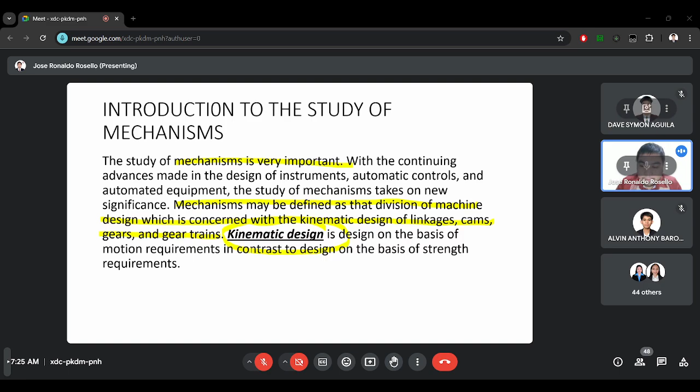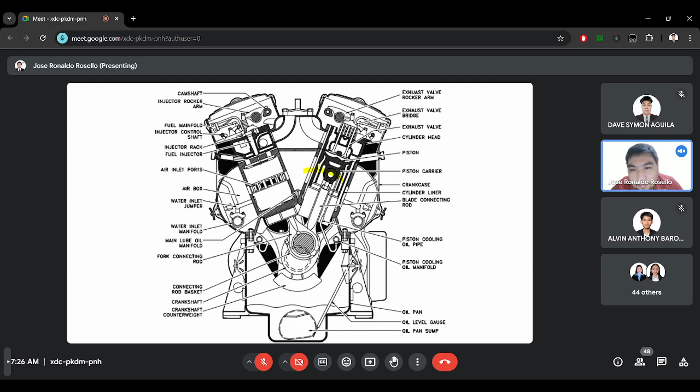For a clearer view, if you can imagine, this one is what we call the piston head. Then we have a link here. Then we have a crank here.

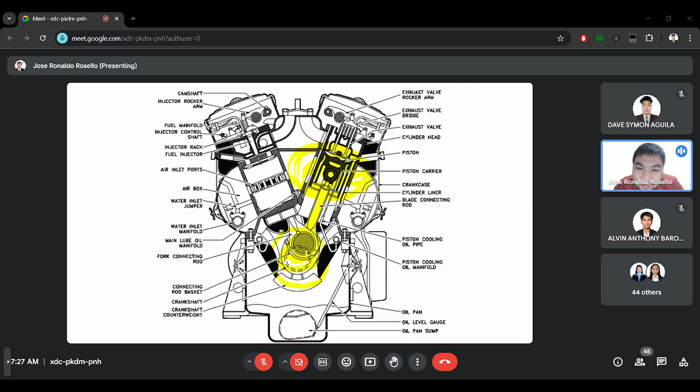So this crankshaft and this connecting rod can be represented using what I showed you, the slider crank mechanism. This is just, if you can imagine, a stick figure diagram of the actual machine, because in this way we can analyze the movement, velocity, and acceleration simpler than using the actual drawing.

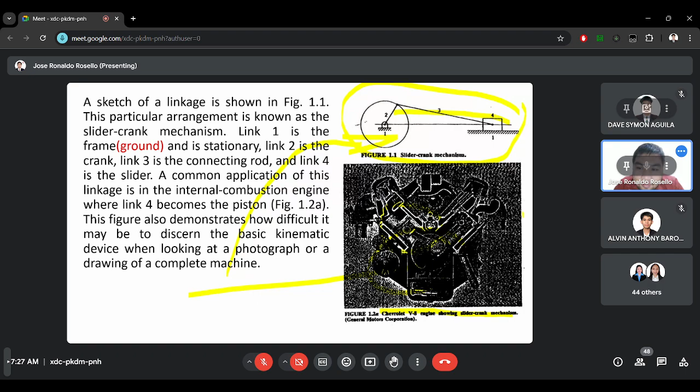Again, this is how it looks like. This is how a piston engine, piston head, and cylinder are arranged, and it can be interpreted into a slider crank mechanism, just like this. Again, this is what we call a kinematic diagram.

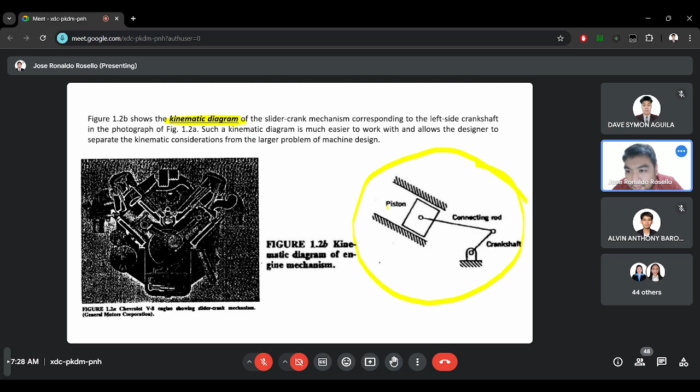For the kinematic diagram, this one is the connecting rod. This one represents the crankshaft, and this one represents the piston head. These have parts: the ground, the link, the slider, the joints, which I will discuss later.

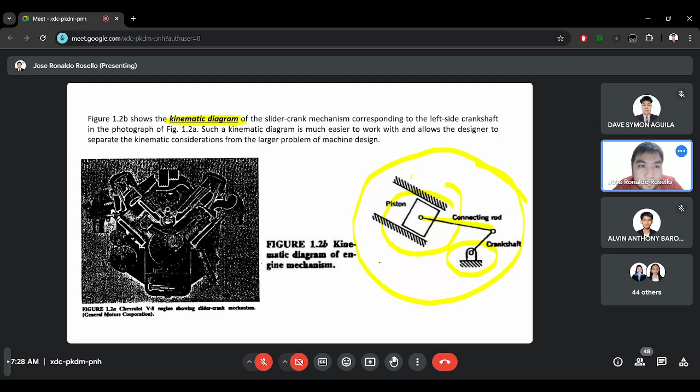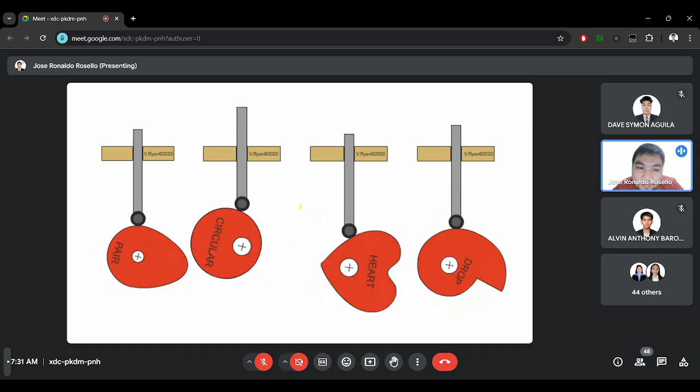Then we have the gears. Gears are used in many applications to transmit motion from one shaft to another with a constant angular velocity ratio. This is very familiar to all of us because as mechanical engineers, one of the symbols that identifies us is a gear.

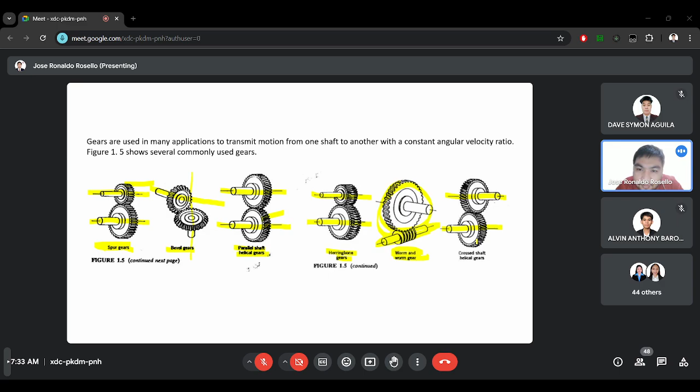We also have what we call the gear train. For gear trains, it's a simple understanding of having multiple gears in contact. So at least two is already considered a gear train.

So for this example, we are required to drive gear number 4 using gear number 1. And to make gear number 4 rotate, we have installed a compound gear in the middle to have the translation of the rotation from gear 1 to gear 2, then gear 2 to gear 3, then gear 3 to gear 4. So this is what we call the gear train.

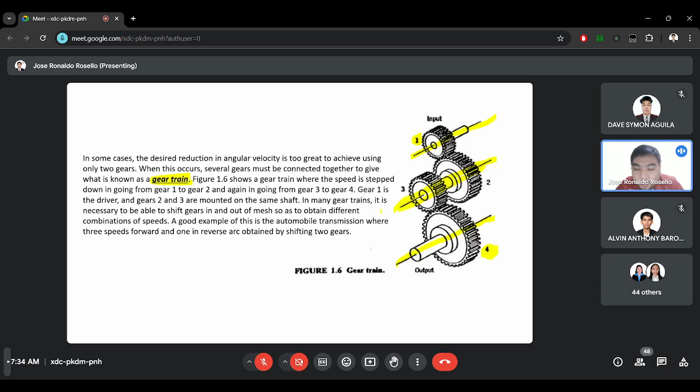So again, for gears, we will have a more specific topic here after the midterm, and you will be having a design plate for the gears.

Power transmitted by the elements must be so slight as to be negligible, which allows the components to be proportioned primarily on the basis of motion, strength being secondary importance.

So after machine elements, you will be taking machine design. And in machine design, you will focus on the strength applied on the materials. Once we have designed the mechanism in machine elements, in the machine design topic, we'll be analyzing the strength. So for this course, we will focus on the motions of the mechanism parts.

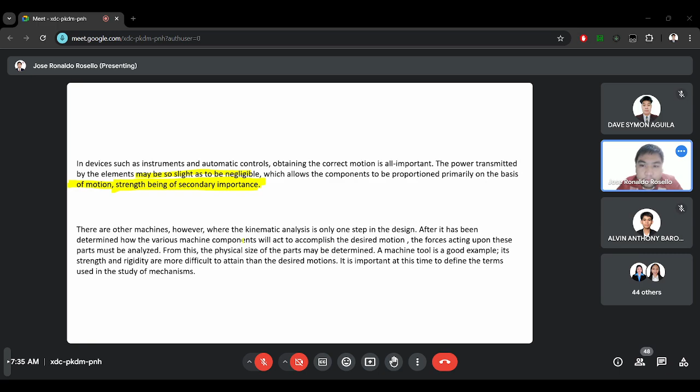What is the difference between a mechanism and a machine? A mechanism is a combination of rigid or resistant bodies, so formed and connected that they move upon each other with definite relative motion.

When we say relative motion, it's what we call when a machine member moves because of another. So if they are connected and one moves, the other is influenced by its movement - it's what we call relative motion.

Then a machine is a mechanism or a collection of mechanisms which transmits force from the source of power to the resistance to be overcome. Usually, a machine is identified by having a lot of different mechanisms inside it.

So the simpler assembly is the mechanism, while the more complex assembly is our machine.

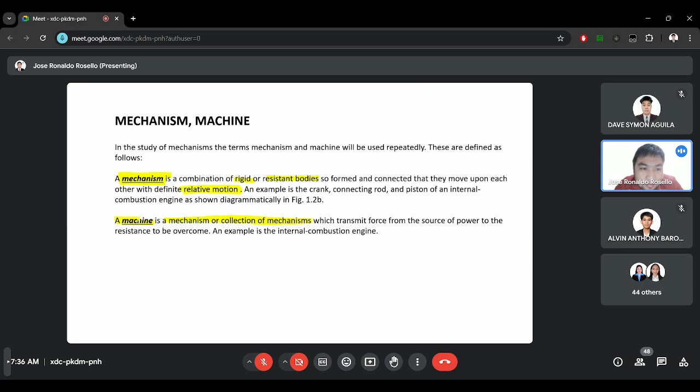With regards to motion, we have four major types of motion. We can start with the plane motion. The plane motion, it's on a single plane where we have the translation. For translation, we have rectilinear, where all points of the body move in parallel straight line paths.

When the body moves back and forth in this manner, it is called reciprocating. So there's like this one: in figure 1.7, the slider 4 reciprocates between the limits B prime and B double prime.

What does it mean? This one is what we call the slider 4. This rectangular figure is being driven by this circular link, this letter A. So every time this link rotates, where its pivot is here at O2, it influences the slider to move back and forth.

And the limit on how far the slider moves is identified here at B prime and here at B double prime. So when there's a translation of motion, we can call it rectilinear translation.

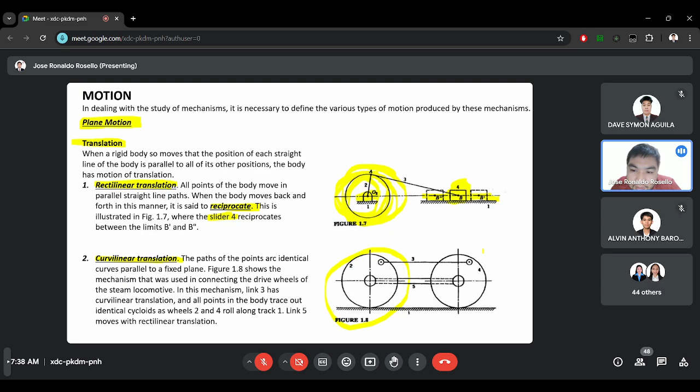Then for curvilinear - since this is from rotating to sliding, that's rectilinear - this is from rotating to another rotation. So curvilinear translation: the paths of the points are identical curves parallel to a fixed plane.

So this one is identical curves because these are identical links, circles. In this mechanism, link 3 connects link 2 and link 4, so they can translate motion to each other. So this is translation motion.

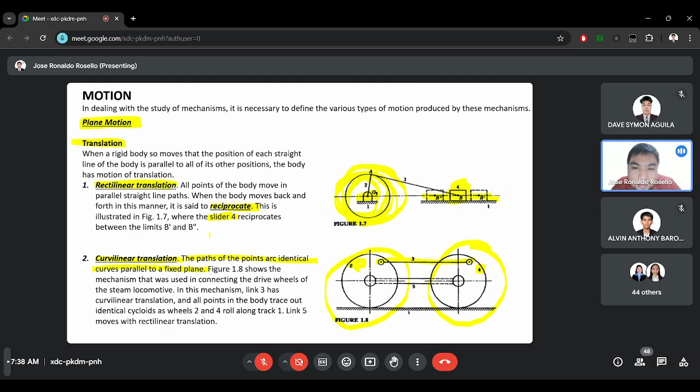Another type for our plane motion is the rotation. So the rotation, the mechanism rotates on a pivot, which is here, the O2. And it influences the other parts, just like this one.

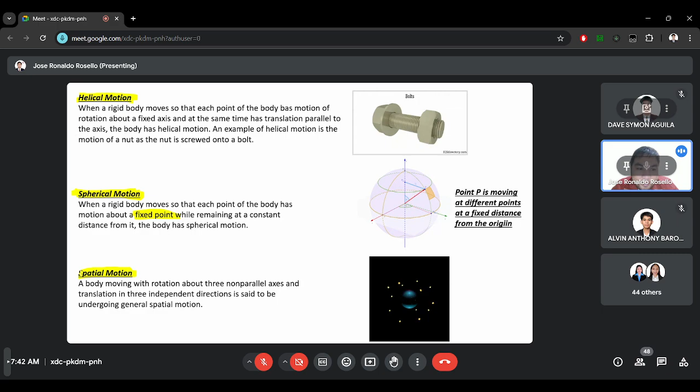Those are the four major types of motion. Again, just a recap: we have plane motion, helical motion, spherical motion, and spatial motion. And under plane motion, we have rotation and translation.

For mechanism, since it is a representation of machine member or the movement of machines, we have what we call the cycle, period, and phase. A cycle is whereas the machine member starts moving and ends on its starting position. So if a machine member rotates, but once it has completed its full rotation, that's what we call a cycle.

Since our motion is a repetitive motion, like in machines, once it has completed a single rotation, we will call it a cycle. Then how long it took the machine to complete the cycle is what we call the period.

To identify the phase is the part by part distribution of the cycle. So if the cycle requires three stages, we will call it phases. So the breakdown of the part by part motion of a mechanism or machine is what we call phase. And the full rotation or full motion of a machine is what we call the cycle. The time it took to complete the cycle is what we call the period.

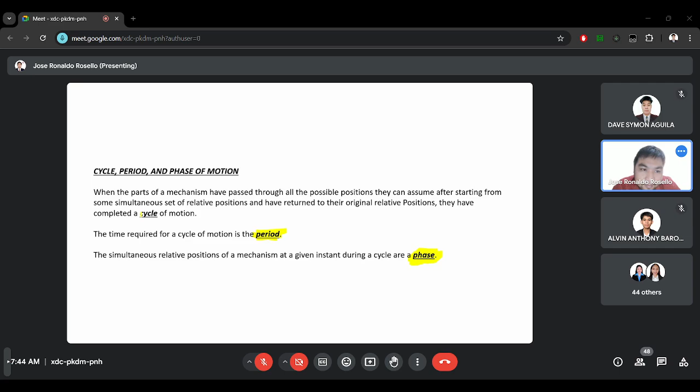Now let's look upon the kinematic diagram. So at first I showed you what the kinematic diagram is using a slider crank mechanism, and the links or the pairing elements must be identified. So how is it drawn? For pairing elements, we have what we call the lower pair and the higher pair.

So for the lower pair, these are two parts of a diagram or two parts of a machine that are fixed by a joint. So for this example, if they are fixed on a pin joint, they are called a lower pair. So what is a sample of that? Let's go back to our figure.

So looking at this figure, we have link 2 and link 3. Link 2 and link 3 are connected at joint A. So the connection of link 2 and link 3 is fixed at joint A, or what we call the pin joint. Meaning, if they are fixed, this is what we call a lower pair. 2 and 3 is a lower pair.

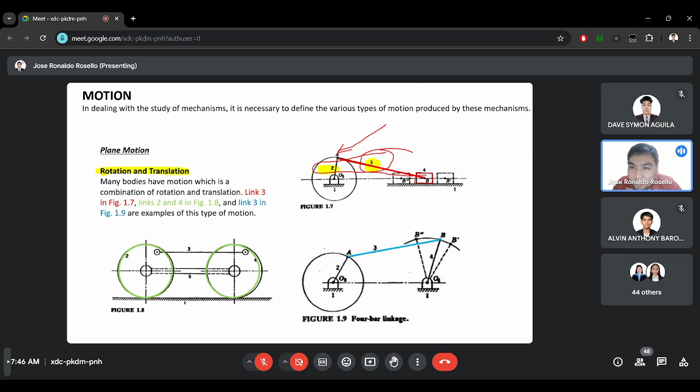So the same way with 3 and 4, whereas 4 is this square box and 3 is this rectangular link, meaning 3 and 4 is also a lower pair because they are fixed at this joint B. And they are called a lower pair if they are fixed at a joint.

So what is a higher pair? If we have a lower pair, we have a higher pair. And the higher pair is the pair of elements which has mating contact only. Examples of this are gears or cams. If the connection takes place at a point or along a line, such as in a ball bearing or between two gear teeth in contact, it is known as a higher pair.

So let's go back to the sample of a cam. This one.

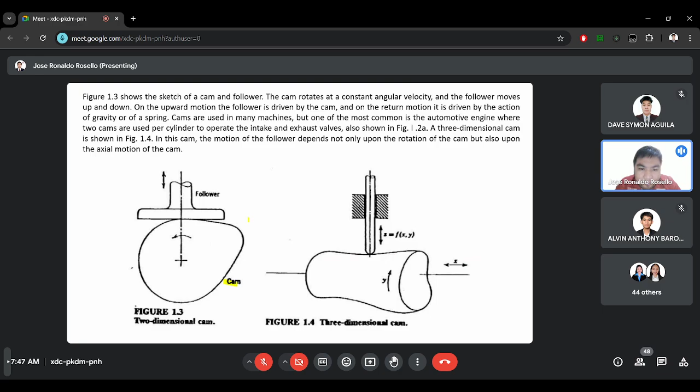This one is the cam. This one is a follower. Their point of contact is the profile of the cam. So they are not fixed to each other. So this follower is also a link, and this cam is also a link. And they make contact to each other, but not at a fixed point.

So while the cam is rotating, just like in this figure, this roller contact, this contact is a link, and the cam itself is a link also. So these two are considered as a higher pair. They are not fixed by a joint.

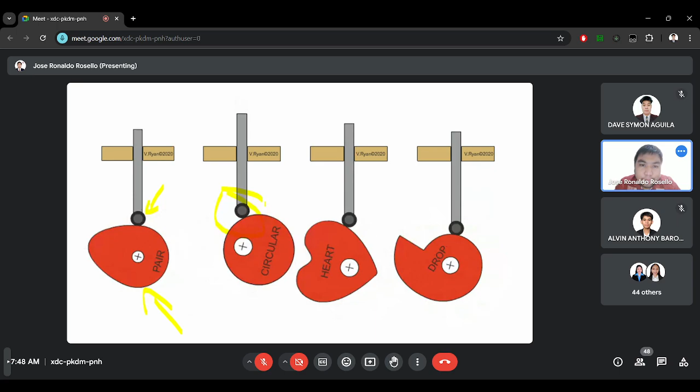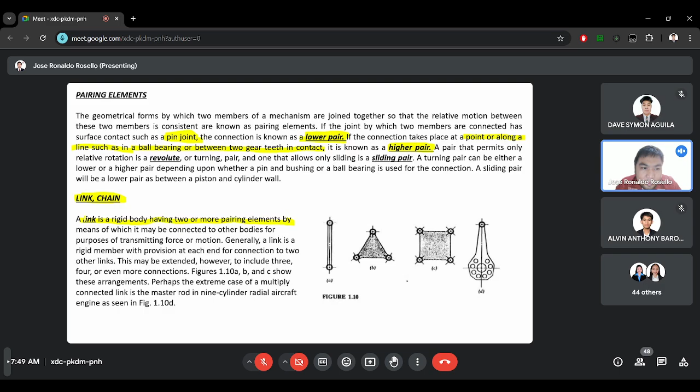So let's identify what are links. I'm talking about links, I'm talking about joints. So what is a link? A link is a rigid body having two or more pairing elements, meaning they are at least connected to two other links. And they are connected through the joints or through a contact. Then, a link is a rigid member with provision at the end.

So, how do we identify a link? It can be represented in drawing by using a straight line, just like this one. If there are more than two links connected to another link, we can use a triangle link. So this is also considered as one link only. If there are a lot of links connected to another link, we can use multiple parts.

So a link is a representation of a machine member in drawing a kinematic diagram. But technically, it is also a link in the machine part. So let's just identify a link as a rigid body which connects other links to each other.

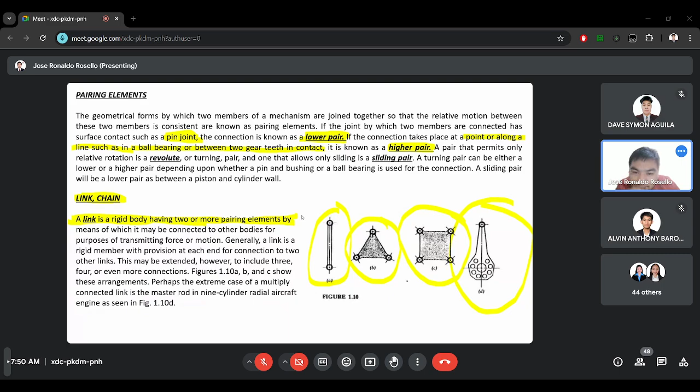Then we have the kinematic chain. As mentioned earlier, there's a relative motion in mechanisms and machines. And whenever a machine member moves, it influences the other machine members. It's what we call the relative motion. And the connection of links is what we call the kinematic chain.

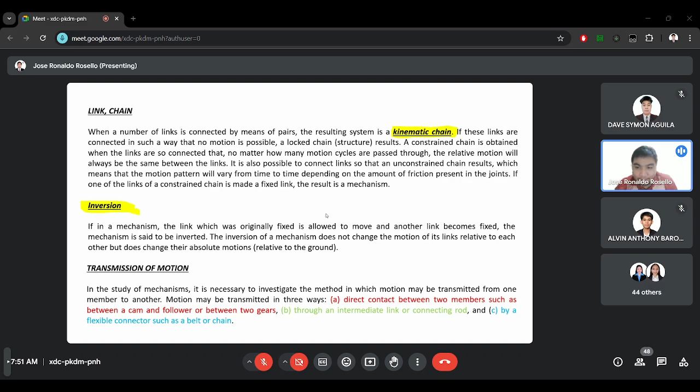For the transmission of motion, how do we transmit motion? We can transmit motion by having direct contact between members, such as cam and follower and gears, or through an intermediate link or rod. This is what we call the higher pair and the lower pair. Again, since machine elements deals with the kinematics of our machines, we are to deal only with the kinematic diagrams as a representation of machine members. In that way, we can analyze the contact of two members or links.

The one here at C, we can also transmit motion using flexible connectors such as belt or chain. But we will discuss this after midterm. So this is a topic after gears, but for this first half, we will just tackle the kinematics of the machines or mechanisms.

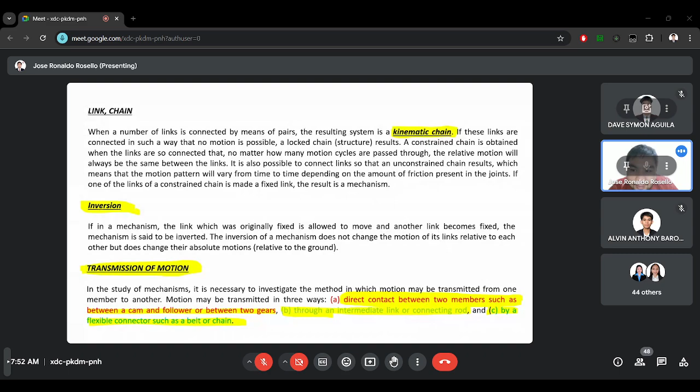We have what we call the mobility and degrees of freedom. The mobility of a mechanism is the number of degrees of freedom it possesses. Meaning, there was a concept developed before about this mobility or degrees of freedom because the technology was limited in the past. There was no AutoCAD that we can use in the computers. There was no SolidWorks. And they were not able to visualize clearly if their design will perform as intended. Meaning, all their design comes by hand.

They draw it, they do a prototype, but there came a concept that they want to identify if the machine will move even without building a prototype. Because making a prototype might take some time and some resources, which they did not want to invest. So they thought of a process or a formula on how to determine if a machine design would move just by using a formula. Again, this concept of mobility or degrees of freedom was created because before they did not have simulations on computers.

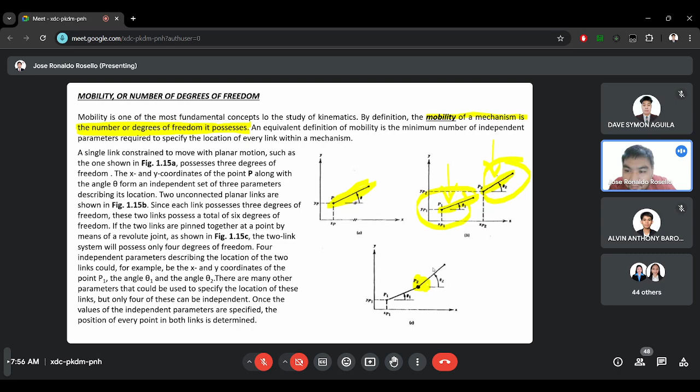So what if we connect them to each other? We connect them at point P2. So how many degrees of freedom does this assembly have? It's not as simple as addition. If we have 3 degrees of freedom for this link, and 3 degrees of freedom for the other link, if we connect them, they do not have 6 degrees of freedom. Instead, let's analyze.

Since this is connected, this is now considered as one mechanism. It's a single mechanism now because they are already connected. If we move link 1 going up, it will influence the other link to go up also. If we move it going down, the other link will move also. Meaning, there is only one y-axis movement for both of them, because if you move one link, the other link will follow.

So that's the same thing with left and right. So this is a horizontal motion. Since if we move one link, the other link will also follow. So the independent X and Y movement from the left and the right link is now considered as one because they are connected. And for the rotation, since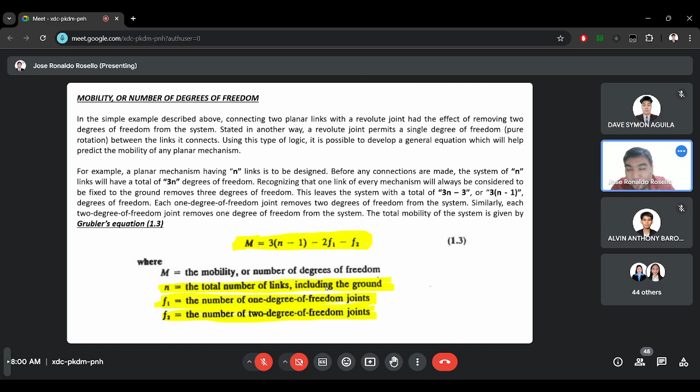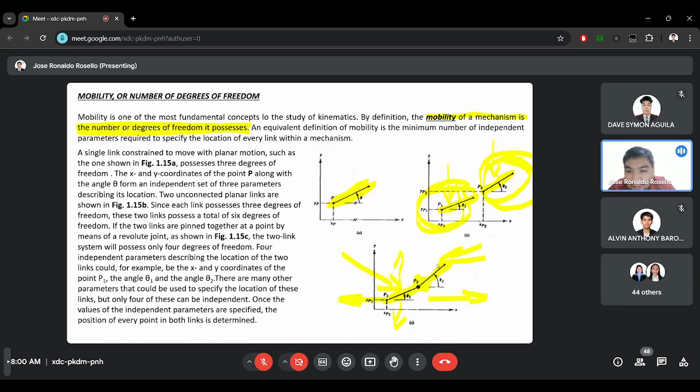Okay? So mobility is the quantitative property, and degrees of freedom is its unit. How did they come up with this equation? After analyzing it, they derived this equation. So now I will teach you how to identify the number of links and identify the number of F1, or the lower pair, and F2, which is the higher pair.

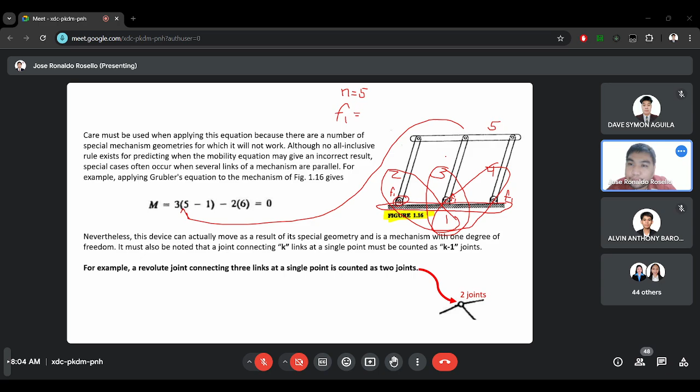Then link 2 is also connected to link 5. So their joint can be identified as F1, 3, and 5. F1. Then 4 and 5. F1. So how many F1 are there? 1, 2, 3, 4, 5, 6. Since we have identified F1, we will just input it in the equation. That's why this is 6.

Then for F2, let's look at the diagram. A higher pair is only for cams and gears, and this mechanism does not have any link that is a cam or a gear, so there is no F2. F2 equals 0. And when we compute for mobility using these numbers in the equation, we can identify that mobility is equal to 0. So what does it mean if mobility is equal to 0?

I'll show you in the next slide, but before that, let's identify what we call this revolute joint. There may be a figure where a joint can hold more than 2 links. So for this example, if a joint has 3 links to it, the F1 here is considered to be 2 joints. So we have F1 here. This is for this link, and we have F1 here for this whole pair and this other link. So that's why we have what we call the relation K minus 1. K meaning how many links are connected to a single joint. And if we have 3 links, we subtract 1. The joints here will be counted as 2.

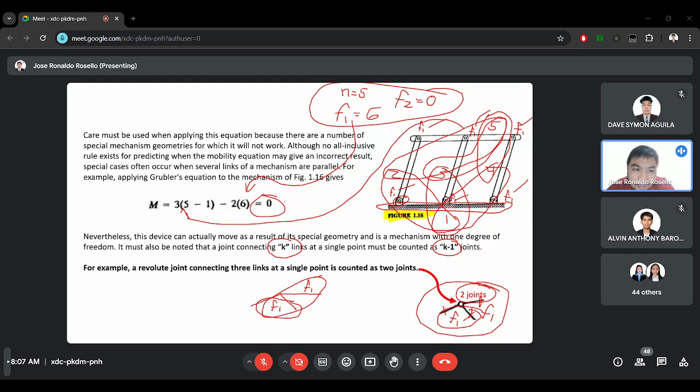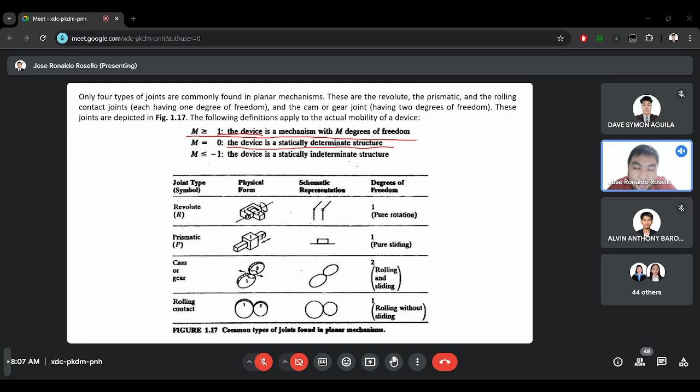But for now, what does it mean when the mobility is equal to 0? When the mobility is equal to 0, the conclusion is the device is a statically determinate structure. What does it mean? It means that it can also move. When the outcome of the equation is 1 or greater than or equal to 1, the device is a mechanism with m degrees of freedom. So if we have a final answer of 3, we will have the conclusion the device is a mechanism with 3 degrees of freedom. But during computation, if we encounter a negative answer, which is less than or equal to -1, our conclusion is the device is a statically indeterminate structure.

So what is the difference between m equals 0 and m is equal to or less than -1? So for this one, it is assumed that the mechanism will not move. But for m equals 0, there's a chance that it can move or not. So this is a maybe. But for less than or equal to -1, it is sure that the mechanism will not move. But for a positive answer greater than or equal to 1, the mechanism design will surely move. So they added these conclusions to these equations because they did not have simulations in drawings before. These are their references if their design will move or not.

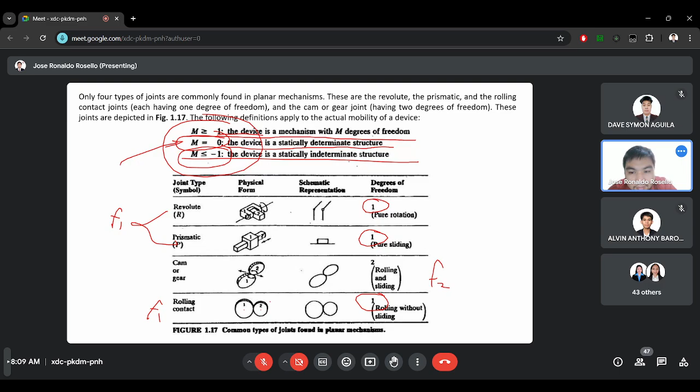Then for F1 and F2, on how to identify them. For F1, we have 3 types. This one, F1, and this one is F1 also. Then for F2, we have only cams or gears. This is F2. So if you will see, degrees of freedom is 1. That's why it's F1, freedom 1. Then F2. So what is the difference between rolling contact and cams or gears? So for rolling contact, let's just imagine 2 cylinders whose pivot or joint is at the center of the rolling contact. But for cams, the center is offset. They can be here.

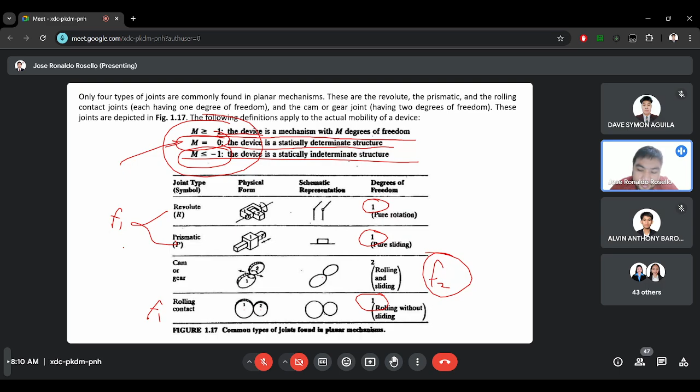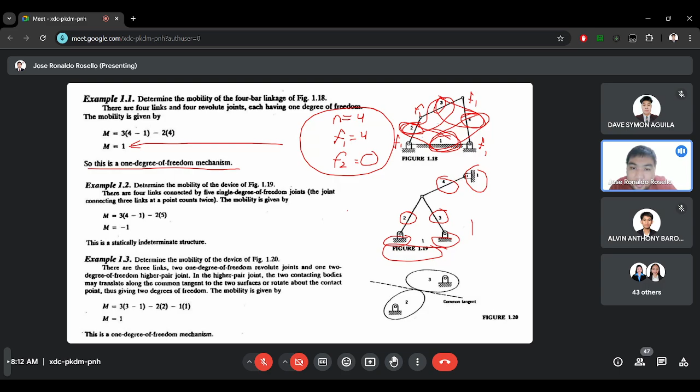Then for F1, we have connections. Link 2 and link 3, we have F1. Link 1 and link 3, we have F1. Link 1 and link 4, we have F1. Then we have this joint. So link 2, 3, and 4 are connected to a single joint. So this is what I'm saying earlier. We can have k minus 1, where k is the number of links connected to a single joint. And link 2, 3, 4 is 3 links connected to a single joint, meaning the F1 here is 2. So we can have 2 F1s here.

And let's count the number of F1: 1, 2, 3, 4, and 5. For F2, we don't have any cam or gears. And let's substitute this to the equation. We will have the answer of m equals -1. So for m equals -1, the conclusion is it is a statically indeterminate structure, meaning this will not move. And by imagining it, if we push or rotate link 2 and link 3, there will be no motion produced.

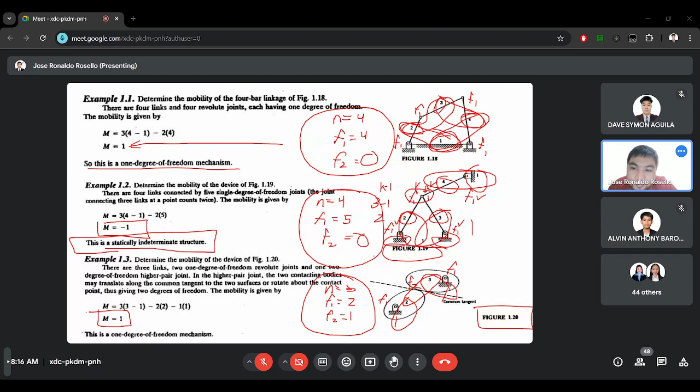That's the first part of our lecture for this. And let's have a small break before proceeding to the next one. So now is 8:16. We will resume by 8:30. Have your breakfast or coffee or anything.

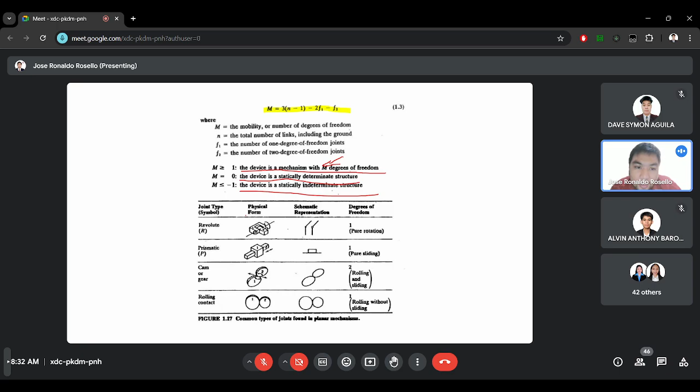Again, to identify F1, we have 3 types of F1. We have this one, and this one. Revolute is a simple joint. They are represented by joining 2 links, then there's a circle in their connection. So that's why we know that it is a joint.

Then for prismatic, we have links like this one. When a slider joint is in contact with the surface, they are considered as a lower pair or a sliding joint. So it's pure sliding or pure rotation. For this example, we have 2 links, a square and a rectangular link. They are sliding. Their contact is considered as a lower pair.

Then for rolling contact, if we have 2 links whose pivots or centers are at the middle, they are considered as rolling contact. If they are cams or gears, they are considered as having 2 degrees of freedom, which is F2, rolling and sliding. Also, if they are gears, they are also considered as F2.

I will have a series of figures here, and I would like to ask a volunteer from the class who would like to answer. By answering, you will have an incentive in our major exam. So who would like to? I will not show the figure. I will ask first who would like to solve for the mobility of the following figure. So anyone from the class?

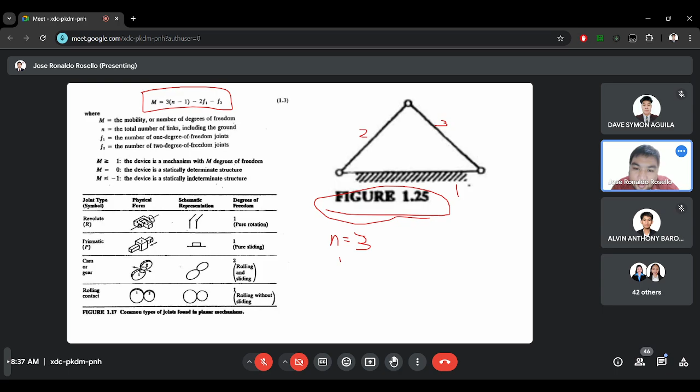Okay. So, how many links do we have? First, let's count ground, this one, the diagonal lines. Which are the other links? We have 2, 3. So, we have 3 links. And how many F1? For F1, let's count the number of pairs. We have 1 and 2. 1 and 2 is connected here.

So this is considered as F1 because this is the schematic representation of F1. Then 2 and 3 is connected here. 3 and 1 is connected here. So we have 3 F1. Then for F2, F2 is only cam or gear, and we don't have any cams or gears here, so 0.

So if we substitute into the equation, M is equal to 3 times the quantity 3 minus 1, minus 2 times 3, minus 0. Mental math. 3 minus 1 is 2. 2 times 3 is 6. Minus 2 times 3, 6. 6 minus 6, 0. 0 minus 0 is 0.

M equals 0. Meaning, our conclusion is the device is a statically determinate structure. Gagalaw ba siya o hindi? Would it move or not? Then, let's look at the figure. Will it move? Since this is a simple triangle, it will not move. Okay. So, you're ready for your example.

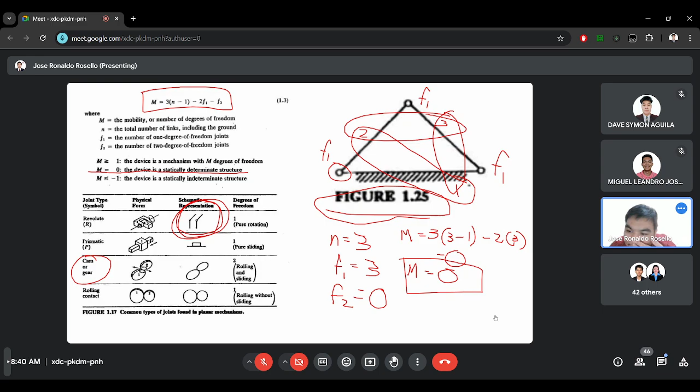Abdiel, do you want to answer the next example? No, sir. So, how about you, Miguel? Do you want to try the next example? Sige po, para may sumagot na. Sige po, sir. Ako na po. Okay, I'll guide you naman.

Okay, for this example, first let's identify the number of links. N is equal to, just describe which one is the links. Sir, yung ground po, dahil kahit dalawa po, considered as one lang po. Yes, you are correct. Tapos, nakadami naman na ito. 10 po. Ay hindi, excluding po yung ground dun. So kung total po, 11.

Okay, let's identify it na muna. So 1, itong ground. So number 2, which one is your number 2? Yung nakakonect po dun sa left side na ground. Okay, this one. Then ang 3, yung 3 at 4 po yung connected po dyan sa, yung sa 2.

Okay, so for this example, if a link is shaded, let's have, we will count it as a singular link. Meaning this whole triangle is just one link. Okay po, so if there is a shade, they are counted as one link only. Okay, meaning this is number 3, this whole triangle, because there is a shade in the area.

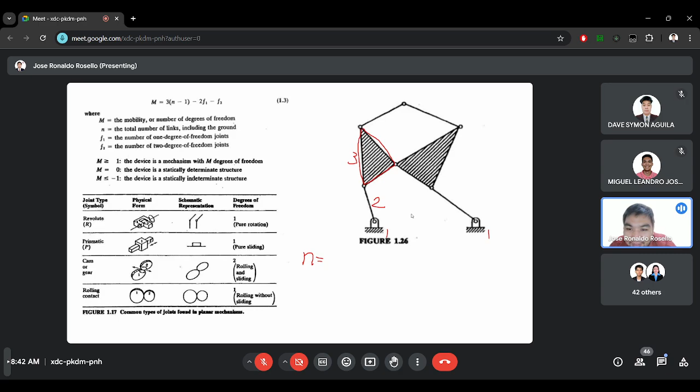Okay, so let's go for number 4. Miguel, what do you think is number 4? Yung 4 po ay connected po sa 3, sa paslanting, sa taas po. Okay, then 5, yung 5 naman po yung pababa connected sa 4. Then 6, yung triangle na yan. Yes, then last link, yung 7 po na pababa. Okay, so using this identification, we have 7 links.

How many do you think are the F1? Hindi po ba 6? When counting F1, the best way to count F1 is look at 2 links and identify where they are connected. So when looking at link 1 and link 2, they are connected here at the joint, so this is F1. For link 2 and link 3, they are connected here. Okay, so on, recount them.

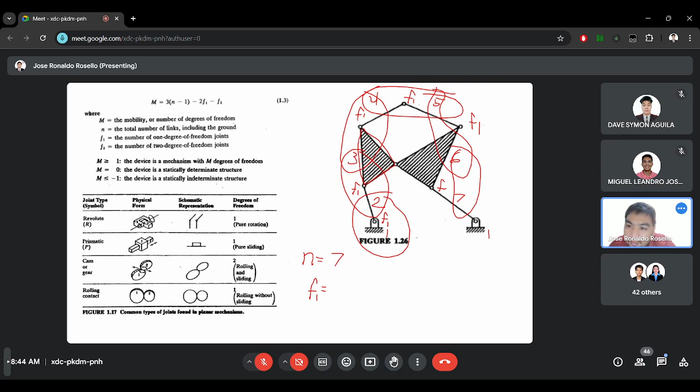8 po, 8. Yeah, that's correct, because when we have link 3 and link 4, it is connected here. When we have link 4 and link 5, this is connected here. 5 and 6, 6 and 7, 7 and 1, and we have 3 and 6, they are connected also, so F1. So how many are these? 1, 2, 3, 4, 5, 6, 7, 8.

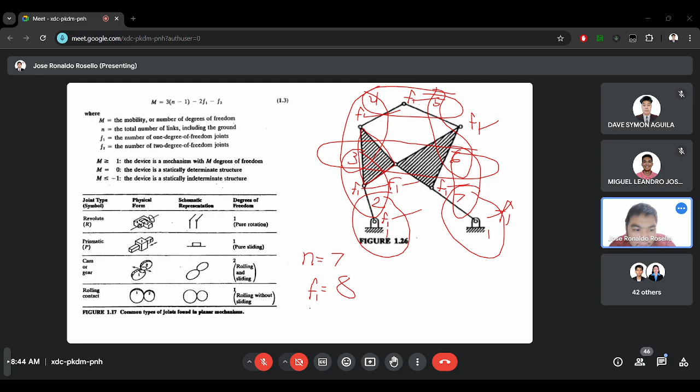And do we have, Miguel, do we have cam or gear? Wala po, kaya 0 po ang F2. Yeah, you are correct. Then let's substitute to the equation.

Mental math, kaya mo na ito ba? What's the answer? 2 po. Parang narinig ko pero hindi ko narinig. 2. 2. Okay.

Again, if we have an answer that is greater than or equal to 1, our conclusion is the device is a mechanism with, how many is the answer? 2. So we will have the device is a mechanism with 2 degrees of freedom. Meaning, without using simulation computer programs, we know that this mechanism can move freely.

Thank you, Miguel. Ilang plus gusto mo sa midterm ba? Perfect na po. Plan. Baka sabihin mo, plus 100. Wag naman. Kahit ilan po. Okay, so thank you.

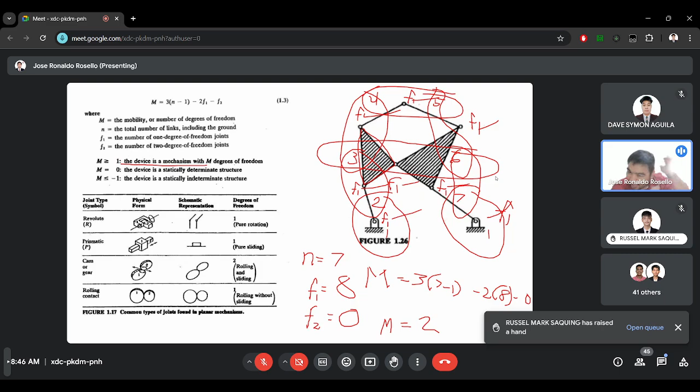Who would like to try the next one? I will not show the figure yet. Okay, RM, let's try it. I-guide mo naman, sir, di ba? Pag si Miguel lang, pero pag ikaw hindi na, kaya mo na, alam mo man.

Wait lang, question sir, anong meaning ng black dyan sa, yung shaded? Meaning hindi siya white. Oo, shaded. So 1 po siya, ang one-way ground. Sige, wait lang, tatry ko sir.

Okay, yung buhay, okay, how many links do we have? 11 po ba? This is counted as what? 3, wait lang sir, dino-drawing ko pa. Oo, okay.

So habang inaantay, while waiting for RM, kakanta muna si Lucel. Di po ako marunong kumanta, sir. Hindi din naman maalam mag-compute si RM sa pareho. 9.

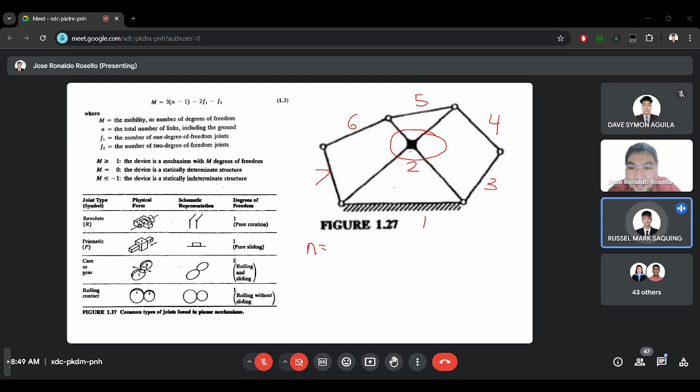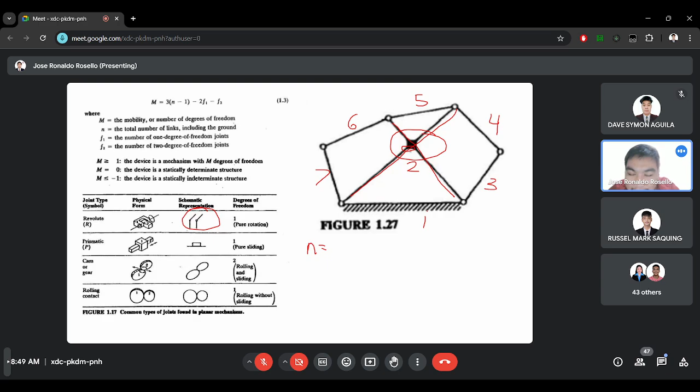Actually, this is completed already. This is the number of links. 7 na lang, yes okay, because there is no indication of a revolute joint here, so there is no circle. Meaning, this X formed here is considered as one link. Okay po, so we have n equals 7.

So we go to F1. How many F1 are there? Ang F1 ay iisa-isahin ba, sir? Yes, just say the pair of links, then I will identify the F1. 1,3, okay, 1,3.

3,4, 3,4, 4,5, okay, 5,6, okay, 6,7, okay, 1,7, okay. At saka, paano yan?

7, how 2? 7, tama 2, ba? This one, opo, tama ba? Okay, 3,2, okay, 4,2, okay, 6,2, okay. Kulang pa ba, sir? Hindi na, sakta na pa. Apo, bale 9 lahat. Okay, let's count.

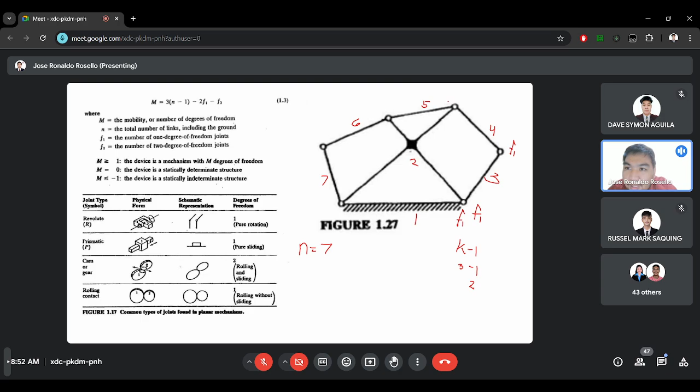And for 3 and 4, we have 1 F1. For 4 and 5, we have 3 links connected, which is link 2, link 4, and link 5, so we have 2 F1 also. For this joint, we have 3 links connected again, which is link 2, link 5, link 6, so we have 2 F1. Then we have 6 and 7, F1. Then for this other last joint, we have 3 links connected: link 1, link 2, and link 7, so we have F1 and another F1.

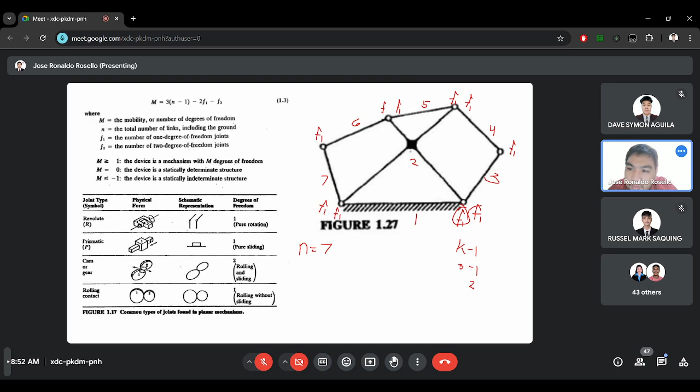And let's count: 1,2,3,4,5,6,7,8,9,10. F1 equals 10 po. So do you have a cam or gear? Wala po, you don't. So let's compute for the mobility. Negative 2 po. Wow. 3 times 7 minus 1 minus 2 times 10 minus 0. 7 minus 1 is 6, 6 times 3 is 18.

18 minus 20, m equals negative 2. If our final answer is less than or equal to -1, it is statically indeterminate, meaning it does not move. Thank you, RM.

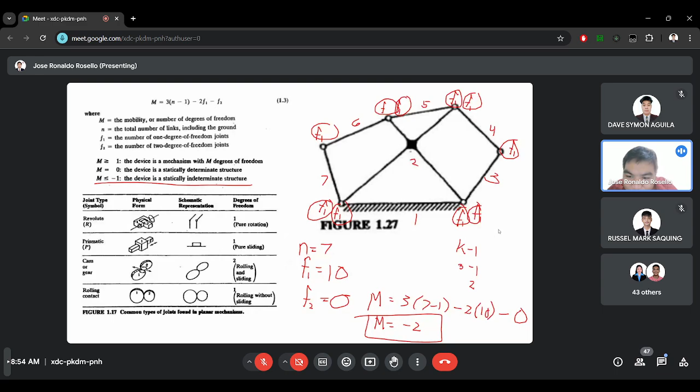Madali pala yan, sir. Oo naman. It's, pagdating na lang sa exam, ano ito, hindi naman ganito yung tinuro. Ba't ganun? Okay, who would like to try another one? Any volunteer ba? Huwag kayo tawa-tawa lang diyan, magsagot din kayo.

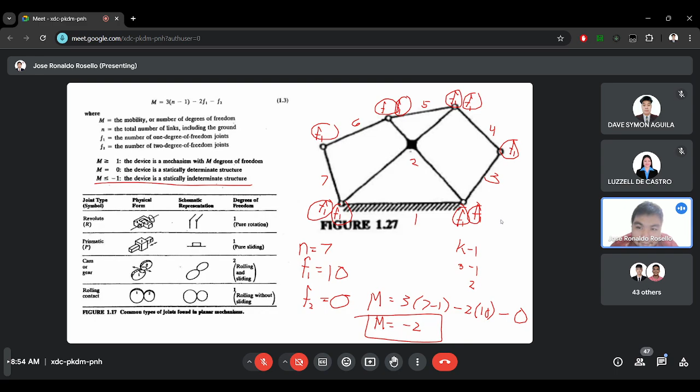RM, may tatanong ako sa'yo. Ano po? Sinong pinakamabait mong kaklase dito? Pinakamabait po ay, apo, si Luzzell. Anong pangalan niya? Luzzell po. Si Luzzell. Hindi po ako mabait, sir. Since ikaw ang pinakamabait na kaklase ni RM, ikaw sasagot sa next topic. Okay, Luzzell, pagtulungan natin to.

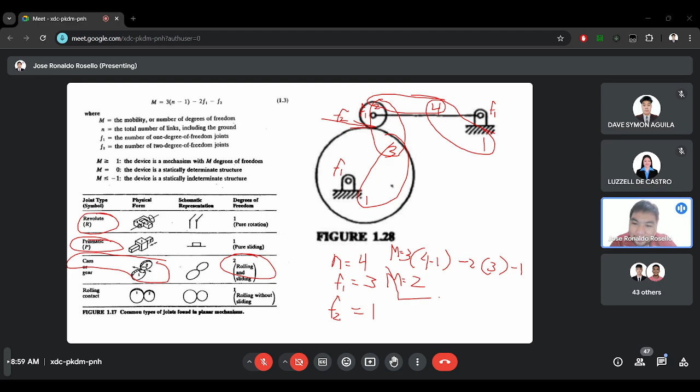Okay, 2. Meaning, if our answer is greater than or equal to positive 1, the device is a mechanism with 2 degrees of freedom. Thank you, Luzzell.

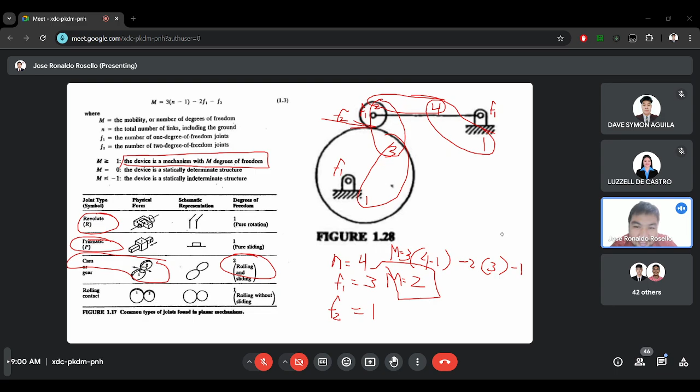Yes, please identify the number of links in this mechanism. Sir, 1 for the ground. Okay, that's always 1. Even though we have 2 grounds, it's considered as 1.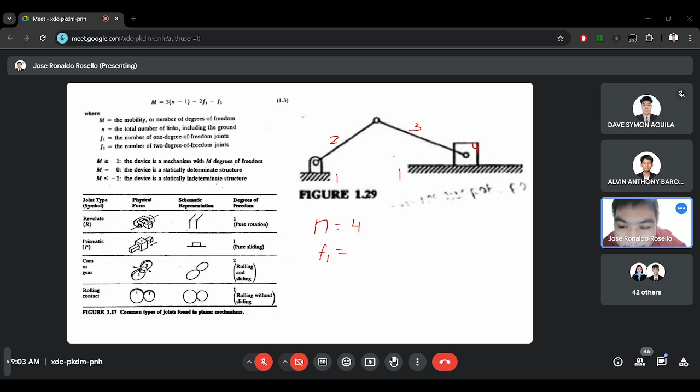Now let's identify the number of F1. Alvin, how many F1 do you think this mechanism has? 4, sir. 4. Okay, how did you know it's 4? 1 to 2, 2 to 3, then 1 to 4, sir.

Okay, so 1 to 2 we have a revolute joint. Then 2 and 3, we have another revolute joint. 3 and 4, another revolute joint. Then 1 and 4, we have what we call the prismatic or sliding joint - that's another F1.

Okay Alvin, do we have an F2? Sir, wala po. None. Let's substitute into the equation: M equals 3 times the quantity 4 minus 1, minus 2 times 4, minus 0. 4 minus 1 is 3, times 3 is 9, minus 2 times 4 is 8. M equals 1. Our conclusion is the device is a mechanism with 1 degree of freedom, meaning this mechanism can move.

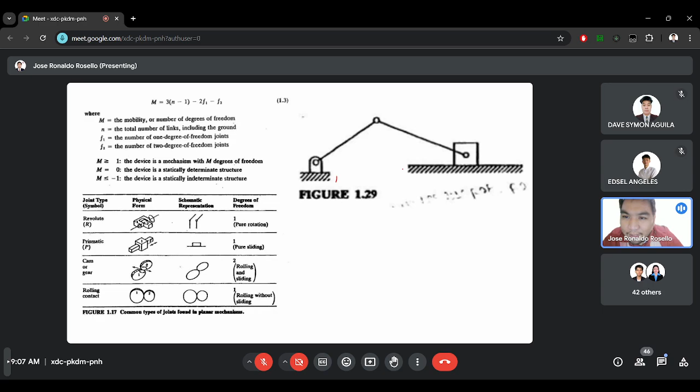13 po yung square. Okay. So the difference with this one, doon sa sinundan nating figure, dito kasi, para siyang trick eh. If you will see here, if we have link 1 here, link 2, and 3, this link is connected to this slider using this representation, this circle. So we have a revolute joint as presented here in the reference. So this representation is proceeded here.

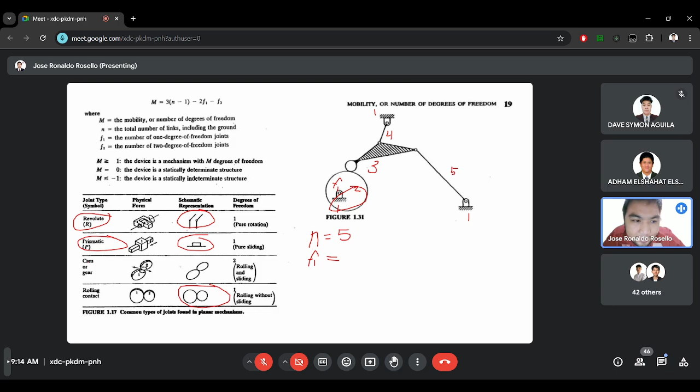So we have 1, 2. 2, 3 is not connected by a revolute. There is no joint. It is also not prismatic. There is no sliding. And it is also not rolling. So meaning, 2 and 3 is a cam. So we will count the contact of 2 and 3 as F2. Okay?

And then 3 and 4, we have F1. 4 and 5. And 5 and 1. You missed 4 and 1. So we also have 4 and 1. So let's count. How many F1? F1's gonna be 1, 2, 3, 4, 5. F2 is gonna be 1. Yes. And let's compute for the mobility.

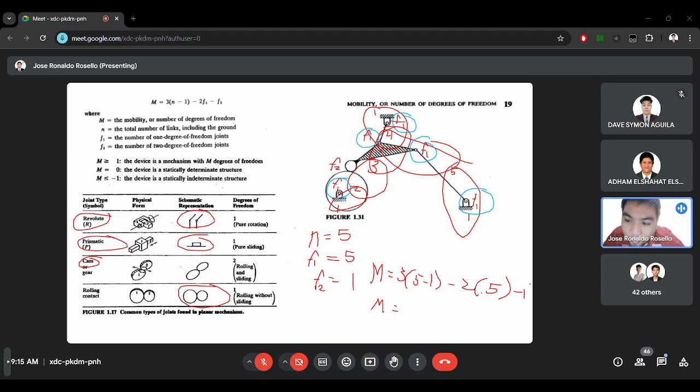M is equal to 3 times the quantity 5 minus 1 minus 2 times 5 minus 1. So what's the answer? M is equal to 1. Okay. So 5 minus 1 is 4, times 3 is 12. 12 minus 2 times 5, which is 10. 12 minus 10 is 2. 2 minus 1 is 1. M is equal to 1. Our conclusion is the device is a mechanism with 1 degree of freedom.

Hi. So that's it for today. We had class regarding the introduction of the machine elements. Just a small recap. We have what we call the kinematic design, which is represented using a kinematic diagram.

So for... yes, Hanz. Oh, you just pressed it. Did you miss?

Anyway, so the kinematic diagram, in simple terms, is the stick figure of a machine member of a machine or a mechanism. So the kinematic diagram is a simple representation of our machines, just like this one, the figures that we have computed.

And in our machine elements, we will cover cams and gears, the different types of cam, different types of gear, how to design cam, and how to design gear. But we will cover them after midterm, the cam and gear.

We have a question from our audience member.

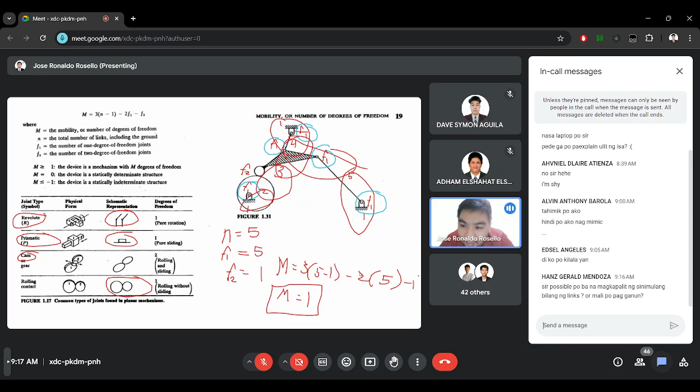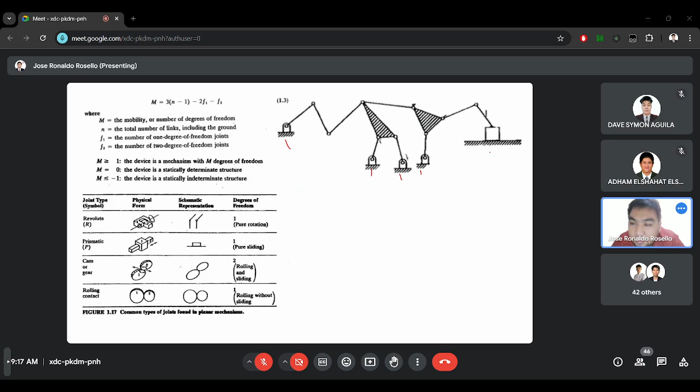Yes, it can be possible. We can start counting. Let's have an example. So what if, for this example, we identify the ground here as 1. Then we'll start with this one, link 2. Then we can start with another. We're chaotic. Let's have this link 3, link 4, and link 5. Then we identify this as link 6.

This is 7. This is 8. This is 9. This is 10. Then the two triangles, this is 11. This is 12. So it's the same thing. We will have the same output. We will have the identified number 12. So with pairings, 1 and 2 is a sliding contact. So there is an F1.

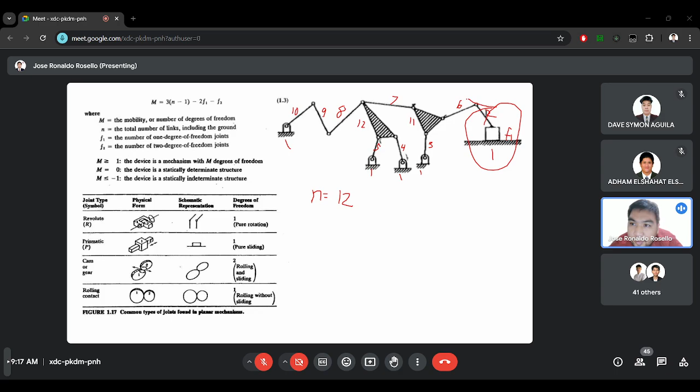We have 2 and 6, F1, 6 and 11, 3 and 11, F1, 3 and 1, F1, 7, 11, F1, 7, 8, 12. Since these are 3 links, we have two F1s. Then 12 and 5, then 12 and 4,

5 and 1, 4 and 1, and 8 and 9, 9 and 10, 10 and 1. So it's the same thing. We will have the same output. 15, we have no F2s, and the answer will still be the same. Is that okay, Hanz?